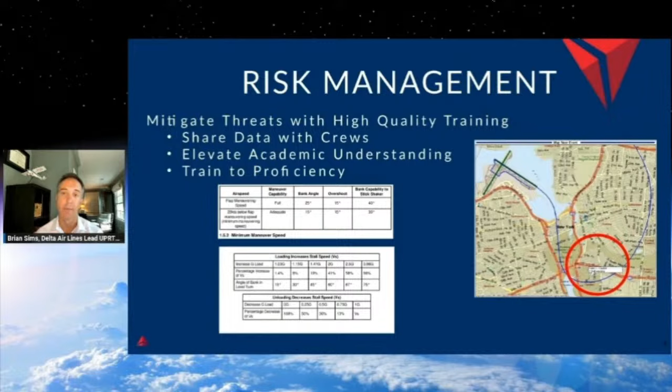We then elevate that with an academic understanding. This may be connected to aircraft systems or aerodynamics, but we want to understand from an academic perspective how that upset occurred. Then we train that to proficiency - first, how to avoid it, but if you've done everything to avoid it and still encounter an upset, we want to make sure our pilots are proficiently able to recover from any upset they may encounter.

If you've heard me speak in the past, I think it's really important in aviation and any training environment that we remember there are 4 levels of learning. At the base level is rote memory, then understanding, application, and correlation. Building on that training, we want our pilots to apply that training in the simulator, and then correlate that simulator or on-aircraft training when they go to the line and encounter the very dynamic environment there.

At Delta, anytime we're briefing a phase of the operation - whether takeoff, approach, landing, go around, whatever it is - we brief the plan. But at the end of that briefing, we always identify the highest threat we're going to encounter in that phase of operation, and then we brief a mitigation strategy. So we always have a plan if things don't go according to plan.

And we fly like we plan. Again, it's a dynamic environment, and sometimes that plan changes. This is where flight path monitoring comes in - it's absolutely essential that both pilots monitor the flight path at all times. If the flight path deviates, we call that out to one another, review the plan, and adjust as necessary.

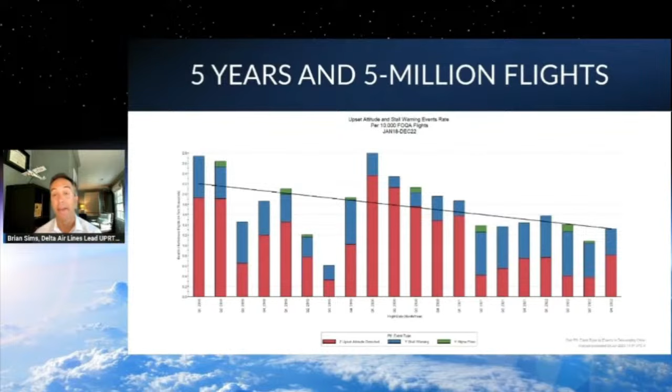And that is over 5 years and 5 million flights worth of data.

Moving on from there, we drill down into each of the specific upsets that occurred. As you can see, the highest number of events we've seen on the line have actually been in the high pitch arena. We track high pitch, low pitch, and high bank, and I'll talk more specifically about some of those events. But high pitch, specifically on the 757, has been the leading upset parameter that gets exceeded.

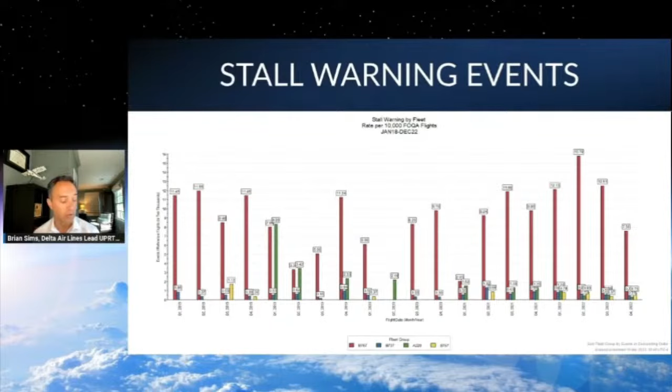This is the stall warning data. This chart is a bit of an eye chart, but it's only for the Boeing aircraft—I'll show you the alpha floor data on the Airbus aircraft in just a minute. This was a bit of a surprise: that red line represents the 767 fleet at Delta, and that fleet has been head and shoulders above all the other fleets in stall warnings. I'll talk specifically about where those events occurred, because they largely occur at a very specific point in time. It's been really helpful for us to understand what's been causing those warnings, and I'll share some examples of things we've done to mitigate that and hopefully bring those numbers down moving forward.

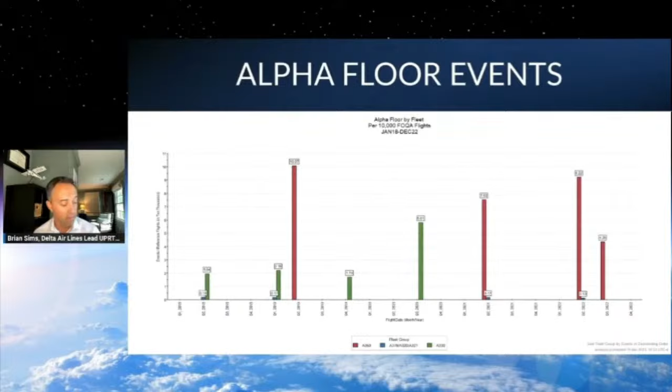Moving on, the relationship between upsets and automation is really, really important. I understand we have different airlines and different corporate and private operators around the world with different ways of flying the aircraft. But one of the things I think is absolutely essential, as an airline instructor who's worked with thousands of pilots over many years, is that we maintain our hand flying skills—that manual flight be something we train and encourage in the aircraft under certain prescribed conditions.

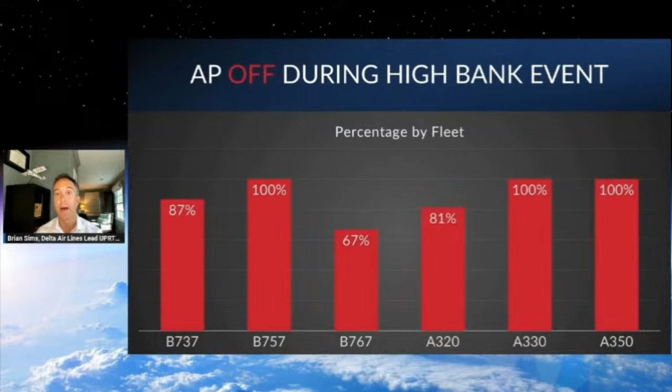There are several reasons these numbers are so high—one is proficiency, one is distraction. That brings up a point: anytime a pilot at Delta goes heads down, we're supposed to tell the other pilot that I'm going heads down, whether it's to read a chart, type in the FMS, or look up paperwork, whatever it is. That raises the awareness of the other pilot to continually monitor the flight path. But again, hand flying skills are really, really essential.

I'm going to give you some specific examples of where some of these upsets occurred, some common denominators we've noticed, and some things we've done to mitigate against that. On the 757, this was absolutely the leading aircraft when it came to nose-high exceedances. On one hand, it's an incredibly powerful, incredibly capable aircraft. On the other hand, if you don't effectively manage the energy of that aircraft and manage the automation, it can lead to an upset.

As they began to rotate too slowly on the 757, that flight director would lead them to a very nose-high attitude in order to get the airspeed back to either V2 plus 15 to V2 plus 25. So one of the things we've done in training is identify that automation issue. But secondly, I've proposed a change to our publications that recommends that even if the automation is taking you above 20 degrees nose up, the pilots stop at 20 degrees nose up and wait for that automation to settle down. Obviously, there are some caveats if ground contact were imminent or something else like that. But under normal operations, we would not want the pilot to exceed these really high pitch attitudes.

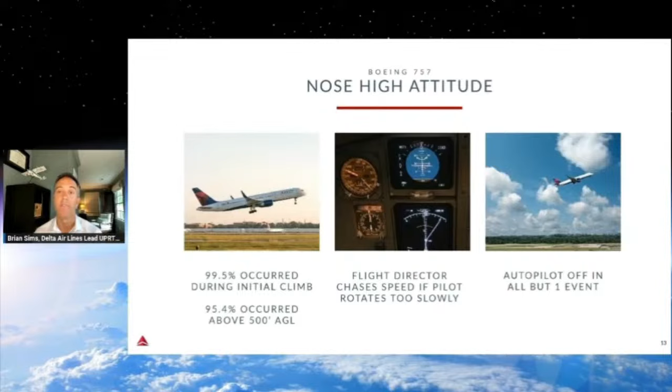The autopilot was off in all but one of those events. So again, just highlighting the need for manual hand flying proficiency.

Nose low - this one was actually a bit of a surprise to us. When we looked at the FOQA data, the Airbus 320 fleet, this includes the A319, 320, and 321, the A320 fleet was the leading fleet for nose low events. In fact, 76% of all nose low events occurred on this fleet. And what was surprising was, one, that fleet was an outlier so far, but that 65% of those occurred with the autopilot engaged. And so that was an opportunity to go back to our instructors and our line check airmen and our subject matter experts and try to determine what the causal factors were.

And I'm not an Airbus pilot, I'm a Boeing 757/767 instructor, so I won't pretend to get into all the details.

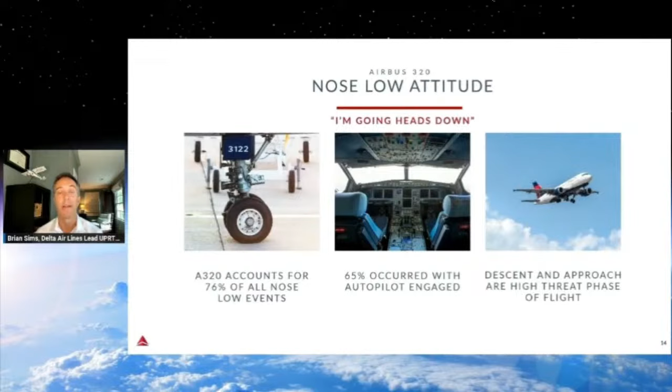But one thing that came out of the data as we were talking to the experts was that it was often when the aircraft was high on the path for an initial descent, and the automation began to chase the speed in order to get the path back under control. And in some cases, it would exceed really nose-low attitudes. So even though automation is great, there are times that it needs to be managed very carefully, and there are times when the automation needs to be disconnected and the pilot needs to take manual control.

Okay, two more examples here. The first is on the 767. I mentioned this earlier - it was the leading cause of stall warnings on the Boeing fleet, and specifically the 767-300. When we looked really closely at the data, what we determined was that at one point, the 767-300 accounted for 51% of the stall warnings at Delta. That fleet only makes up 4% of the entire Delta fleet.

So when you have 4% of the fleet causing 51% of the warnings, that was a really startling number. And then we looked a little closer at the data and determined that not only did it account for that high percentage, but it occurred almost 75% of the time between flaps 1 and flaps up on the flap retraction phase after takeoff. That is an incredibly specific period of time that lasts 10 to 15 seconds after takeoff.

And so one of the things we've done is we have asked Delta to upgrade the flight decks to electronic flight displays. We're going to take the old manual airspeed indicators and keep those, but we're going to upgrade the flight decks so we also have speed tapes available, so the pilots can see their proximity to stall warning as those flaps are being retracted. And quite honestly, the awareness that pilots have that that's such a high threat period of time in the flight - if we can get all hands on deck and everybody paying attention to the maneuvering speeds, the airspeeds, and the flap retraction speeds, that's a win for us.

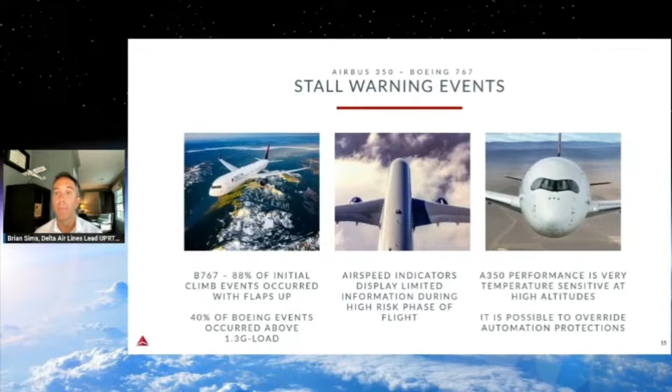Okay, the A350 is the second example I want to share here. I'm going to talk again about this at the end, but the A350, if you'll remember, was the leading Airbus fleet for alpha floor warnings. And one of the things we determined was that it's temperature sensitive at higher altitudes than we initially thought. So we've offered some guidance to our pilots on that, and I'll share that with you at the end.

All right, so threat mitigation. All this data that we have, that's great, but how do we use that?

So I'm going to give you some examples here of how we mitigate those threats in the academic world when we're sharing this information with our pilots. The example on the left is just an old style airspeed indicator. This is what's currently on our 757/76 fleet that's going to be updated. What I'll do when I'm taking a pilot, particularly through initial training, is I'll show them this airspeed indicator. It may be hard to read on your screen, but I'll give you the numbers.

At a given weight, that aircraft has a 1G stall speed of approximately 200 knots. I'll take the pilot through the progression on that airspeed indicator and say, if I increase my bank angle to 30 degrees, this is how much the stall speed increases. Or if I roll over to 60 degrees of bank, or if I get a wake turbulence event and put 2.5 Gs on that wing, how much that changes the stall speed. I can change the stall speed of that aircraft with angle of attack and G load anywhere from 200 knots to almost 290 knots before I exceed the load limit of that wing.

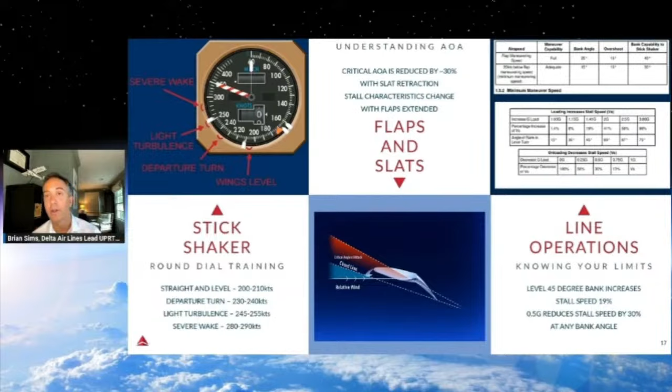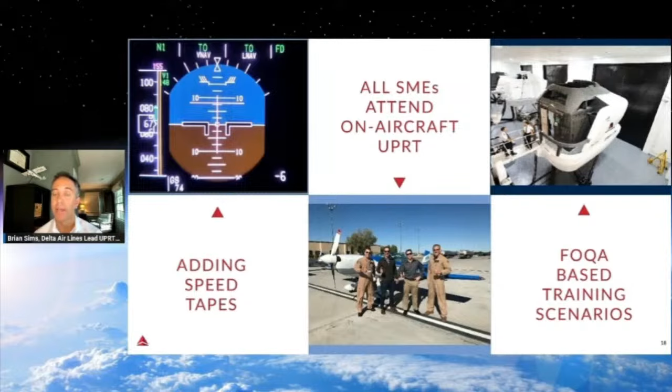And then, as I mentioned earlier, we take the FOQA data and ASAP data and subject matter experts and deliver FOQA-based training scenarios in initial training, upgrade training, recurrent training, what have you.

All right, as we're looking to wrap up here, I want to share some tools for improvement that we are currently using at Delta, and some things that we're looking ahead to in our operation.

So one of the tools we currently use, and I think this is really essential, is an application that Delta uses called Widget Weather, and it gives type-specific forecast turbulence at all altitudes. It also gives the current turbulence report from all the aircraft operating in the system, cloud tops all around the world, and composite radar.

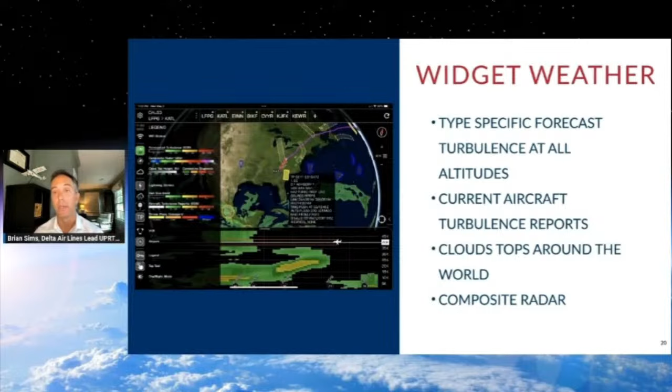When I'm looking at the altitude capability of the aircraft, and I'm seeing that I'm getting within maybe 1,000 or 2,000 feet of the maximum altitude capability on that day, I look closely at this widget weather application to see the forecast turbulence ahead and existing turbulence reports around me, to decide do I really want to push this aircraft any closer to the maximum capability. Because in some cases I might only have 1.3 G capability until I get into a stick shaker at max cruise, and I don't want to do that. So I'm carefully using this application to mitigate that risk and threat, and consider flying at a lower altitude to increase the margin for airspeed and G capability.

The second application we're using is called Flight Pulse, and this gives a personalized flight history to every pilot at Delta. At any given time I can pull up Flight Pulse and see if I've had any unstable events, what level of automation I was using at a given point in the flight. It keeps a record of manual flight time, so now I know down to the second how many minutes and seconds I average flying on any given leg. It gives me aggregate data and shows how I compare to other pilots at Delta. I might average 5 minutes of hand flying on a flight, and another pilot may have 10, or the average might be 20 minutes across the airline.

I'm making up numbers there, but it gives me an opportunity to compare myself to my peers and say, maybe I should think about hand flying a little more. Or, it looks like I've had some unstable approaches in the last 6 months — what could I have done to prevent that, and what can I do differently in the future to improve? I think that's a really important application.

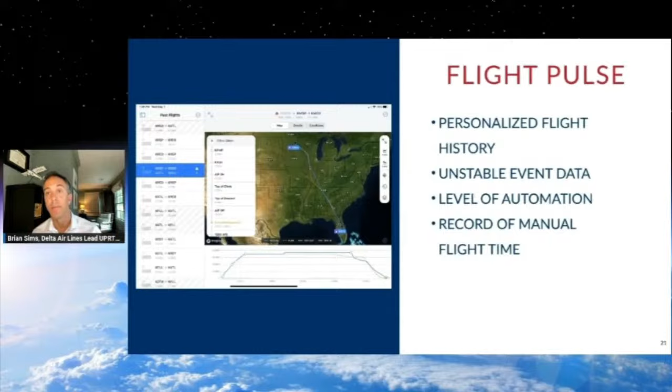Another reminder we put out to our pilots is that the altitude penalties associated with MELs need to be manually applied. That ended up being a causal factor in one of the events we had. So anyway, these are just multiple ways we have given our pilots to mitigate risk and threats in the operation.

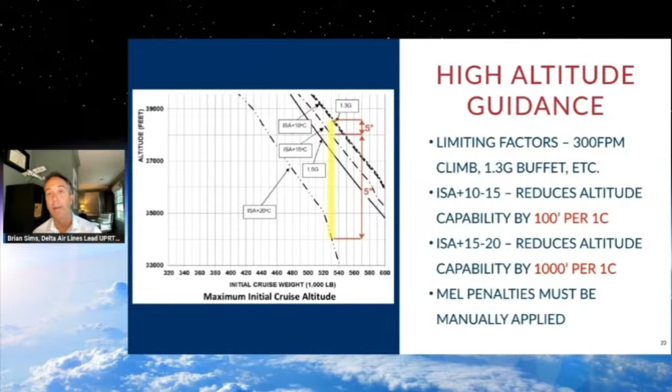Lastly, here is a topic that's been circling in the industry for the last few years, and it's a topic we call loss of margin go-around. It doesn't fit into the traditional loss of control parameters of 25 degrees nose up, 10 degrees nose down, 45 degrees of bank — sometimes it does, but not always. It may be a go-around that was initiated but didn't actually result in a climb within a specified period of time, or the configuration wasn't changed appropriately, or perhaps ground contact became imminent for some reason.

We're in the process of analyzing approximately 9,000 go-arounds that have occurred online, 75,000 go-arounds that have occurred in training, and we're also looking at the qual standards we train our pilots to, trying to identify ways we can train go-arounds better and execute them more safely online. We haven't gotten to the bottom of that study yet, but we're in the process of doing that now, and I think it's going to be an important topic for the UPRT community moving forward.

So as I wrap up here, there are three key takeaways. First, analyze the data in your operation. Secondly, raise the bar in flight training — use that data to train your pilots to proficiency. And then ultimately, apply those skills and that knowledge you've learned in training and share that on the line.

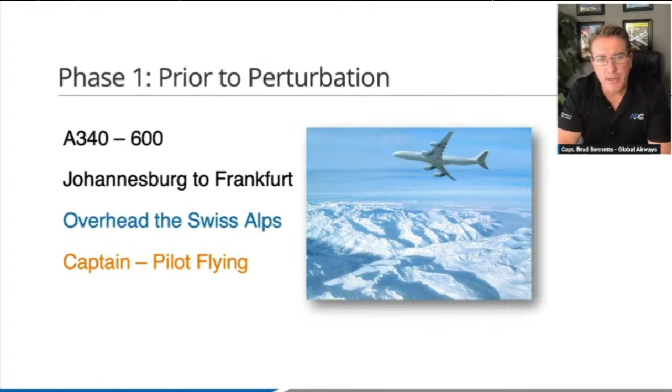Phase 2 was the upset and overspeed that occurred. A few minutes prior to descent, the aircraft was subjected to a rapid wind gradient, consistent with forecast mountain wave activity. Over a period of 14 seconds, there was a decrease of 41 knots in the tailwind they were experiencing, which resulted in a severe overspeed. The MMO of 0.86 was exceeded by Mach 0.03.

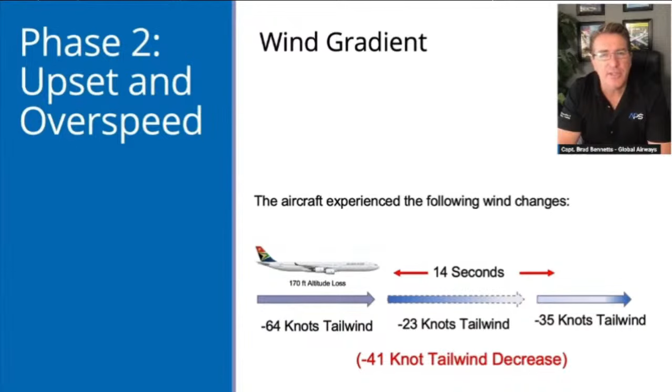At the peak of the overspeed, the trend vector was 30 knots above the indicated speed value, with the top of the trend vector at approximately Mach 0.937. Due to the fact that the speed trend vector was predicting a speed beyond MD, or max design speed, the overspeed was classed as severe.

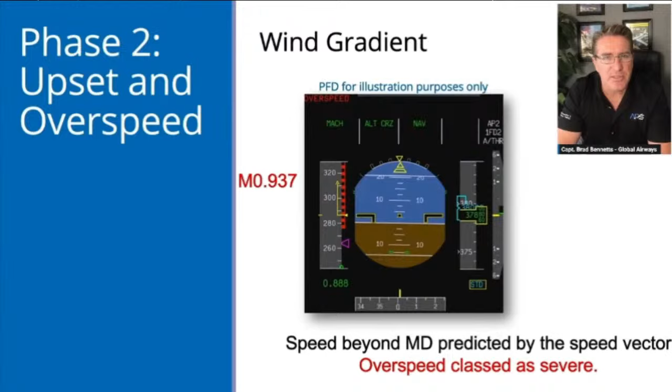The combination of the rapid speed at which the overspeed occurred and the severe predictive trend meant that it contributed to crew startle and the anticipation of significant potential harm. This overspeed also presented in a way that the simulators at South African Airways had not been able to recreate. It was, even for experienced crew, something they had never seen before of similar intensity. The overspeed warning became active and contributed to the surprise and startle effect of the crew, who had been in a relatively low workload environment at that stage.

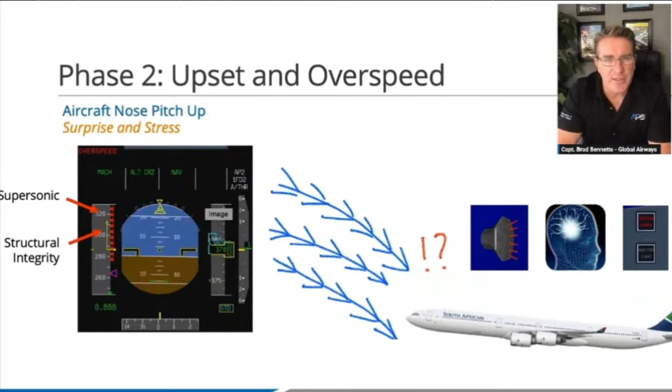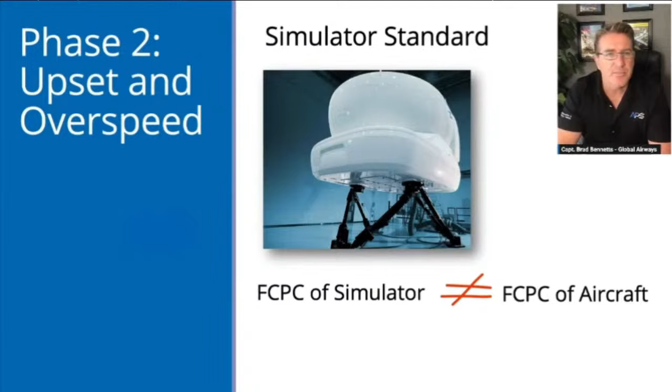During the overspeed, the crew disconnected the autopilot. They received their fair share of criticism over this action, as the Airbus recommendation was to keep the autopilot engaged. However, there was a difference between what the flight crew expected of the automation and the system's actual behavior. Aspects that contributed to this difference included the SAA simulator standard. The Flight Control Primary Computer, or FCPC standard, of the 340-600 simulator was not the same as the FCPC standard installed in the aircraft. This meant that the simulator's automatic system behavior was different to the real aircraft.

During a severe overspeed, the crew's expectation was that the autopilot would disconnect and the high-speed protection would pitch the aircraft nose up. The FCOM describes the autopilot disconnect speed as Mach 0.89. However, when the aircraft reached Mach 0.892 and appeared to be accelerating towards maximum structural speed, the autopilot did not disconnect and the aircraft did not pitch up.

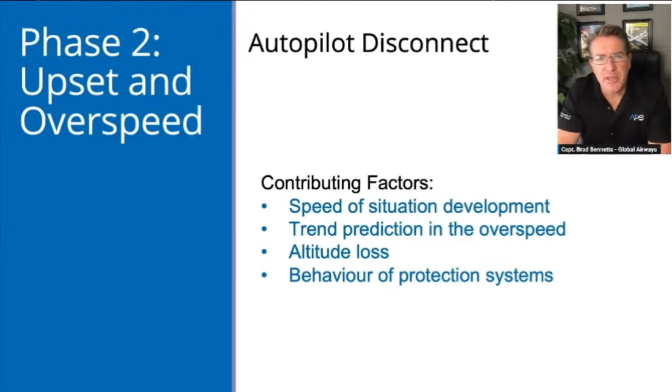The contributing factors that influenced the crew's decision to manually pitch the aircraft's nose up included the speed at which the situation developed, the trend prediction in the overspeed, the altitude loss due to the downdraft component of a mountain wave, the behavior of the automatic protection systems being different to what they were expecting, and also the effect of surprise and stress on the crew to revert to simple, rule-based and intuitive actions to correct the overspeed.

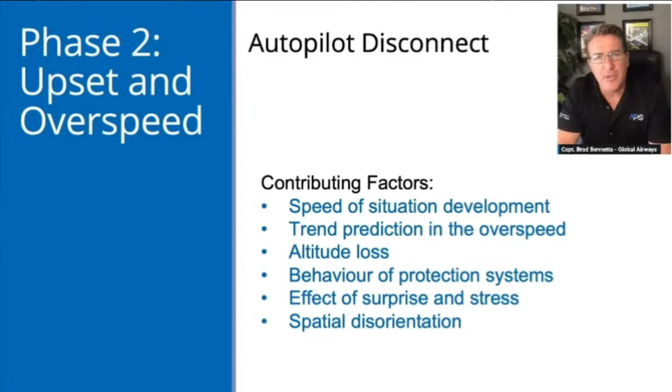There was spatial disorientation caused by the illusion of an aircraft nose-down pitch, which we'll discuss a bit later. Evidence collected in the crew interviews and the FDR data, as well as the recreation of the event in the simulator, indicated that there was significant surprise and stress effects on the crew, which I'm sure you can understand.

One of the crew actually described the fear sensation as having penetrated the deepest part of his body. Now we know that surprise and severe stress often cause crew to revert to simple, rule-based intuitive responses to deal with threats. The action of raising the aircraft nose to reduce speed forms part of the foundational pilot knowledge on the primary and secondary effects of controls, and is normal practice to teach this skill at the beginning of pilot training. This creates what is referred to as primacy, which makes it very likely for a pilot to use when being subjected to stressful conditions.

There was a lot of spatial disorientation. In oversimplistic terms, the aircraft entered a wall of air, the mountain wave. Upon entering this wave, the airspeed reading, which uses dynamic air pressure, increased to show an overspeed. What was misleading about this representation is that it implied the aircraft was accelerating, which was temporarily true from the airspeed perspective, but not from a longitudinal acceleration perspective. The flight data recorder confirmed the mountain wave caused longitudinal deceleration. This presented conflicting sensory signals to the flight crew: what they saw visually was an apparent rapid increase in speed, conflicting with their vestibular sensation of slowing down.

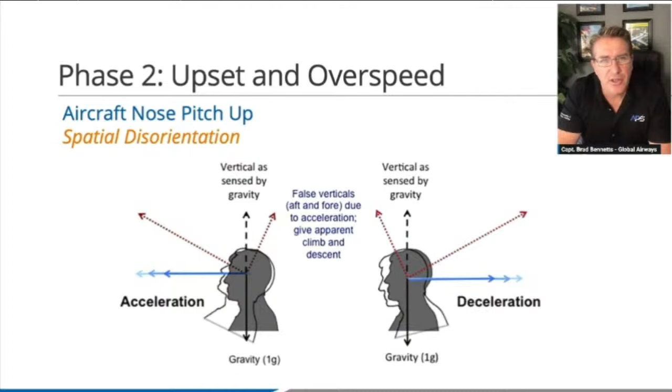The force applied to the pilot's vestibular system in the ears is known as gravito-inertial force.

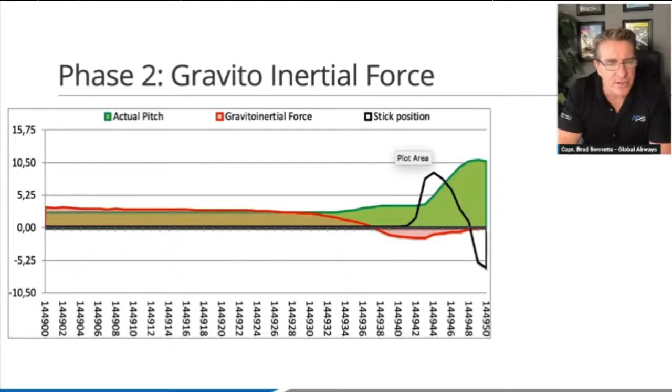In comes Phase 3, the next hole in the Swiss cheese model. This was in the form of the Airbus Operational Engineering Bulletin, or OEB 49. Now, OEB 49 was a red OEB. This indicated that it may have significant impact on the safety of the aircraft.

OEB 49 was issued in response to an undue activation of the alpha protection system, the aerodynamic stall protection system, which occurred on an A321 in 2014. The Airbus 321 lost 4,000 feet of altitude due to the alpha protection system erroneously reducing the angle of attack by pitching the nose down. The incident's probable cause included aspects relating to a damaged angle of attack vane and ice formation.

So this was published in the QRH and the FCOM, and the crew were required to read and review this OEB on every sector. The crew at that stage misinterpreted the scenario unfolding before them as the preconditions for the application of this OEB, and in doing so switched off ADRs 2 and 3.

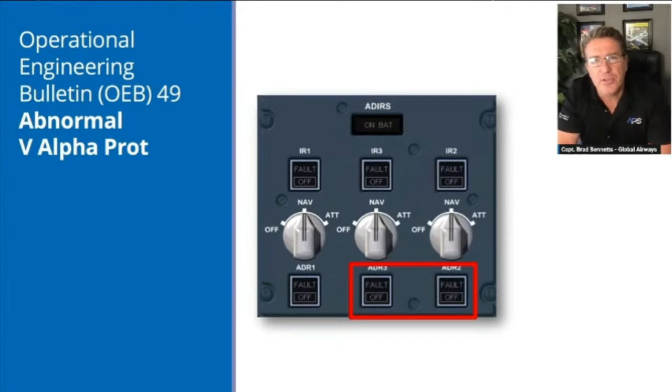In doing so, the flight control law became alternate law, and the auto thrust failed, as designed to do. Due to the overspeed, the auto thrust had commanded idle thrust, so when ADRs 2 and 3 were turned off, the engine thrust locked at idle thrust.

So it's important to understand from the crew's perspective: this moment is 19 seconds into a startling and high-risk event. In other words, the crew had 19 seconds under extreme duress and startle to process everything we have discussed up to this point. The application of OEB 49 caused a cascade of warnings and cautions and had a profound effect on the startle and stress at this critical moment.

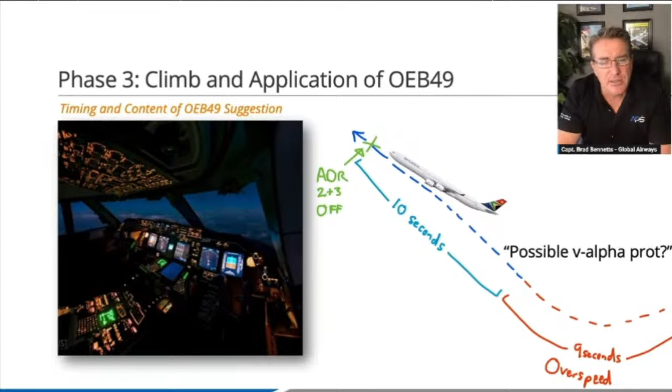When combined with all the other complex factors we've described up to now, it resulted in the aircraft climbing rapidly, at high altitude, with little automatic system protection, and the safety of the flight almost completely resting on the captain, who at that stage was the only one with working displays. At this moment in the sequence, the startle and stress effect increased significantly.

In Phase 4 of the event, which incorporated the speed decay and the crew's stress, we look at the next 24 seconds. The airspeed reduced to its lowest recorded value of 198 knots, and the thrust was sitting at around 36%. The captain stated that he had felt an extreme high level of stress during this period.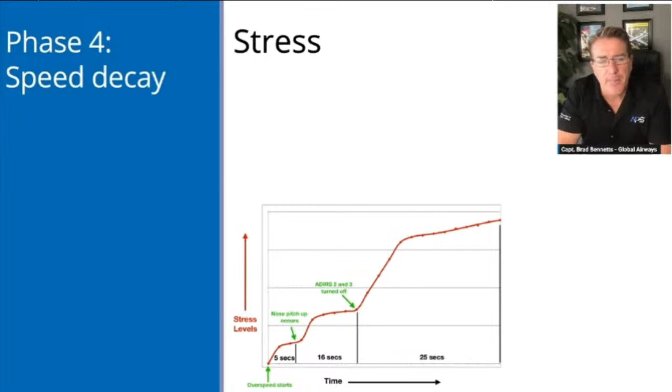He has large gaps in his memory as well. He does remember trying to concentrate on maintaining a constant and safe pitch attitude with wings level. At this point, the third pilot heard the aural stall warning of stall, stall, and noticed that the thrust and the speed was low and was decreasing.

From the onset of the overspeed warning to the application of OEB 49 was 21 seconds. From the application of OEB 49 to the first stall warning was 25 seconds. In those 25 seconds, there was an information and warning overload. There was an altitude alert, a thrust lock chime, three VHF transmissions from ATC, the cockpit door buzzer sounded a few times from the cabin crew, and 25 seconds of master caution.

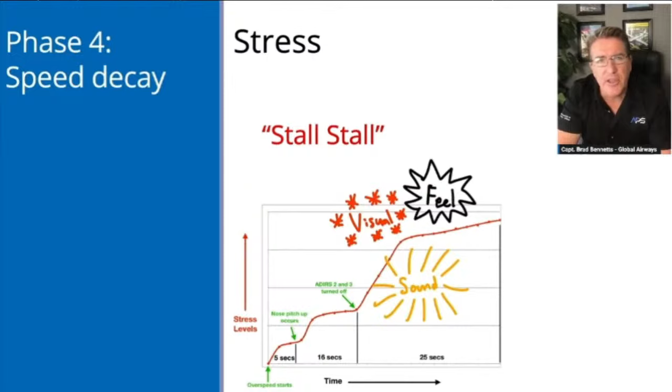So from a visual perspective, the co-pilot's screens had red warnings and no data. The captain's PFD had amber crosses from the alternate law indications, and the flight director would have been providing conflicting guidance. The master caution and the ECAM were producing caution lights and amber lights, and the FMA was flashing thrust lock in amber.

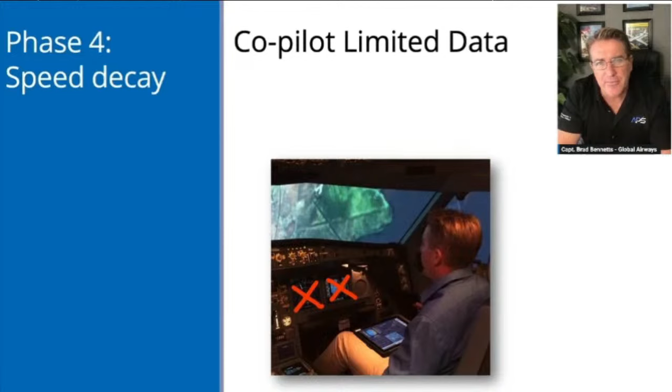So from a handling perspective, the captain was flying the aircraft manually, in alternate law, at high altitude for the first time ever, which due to maneuvering stability would have made manual flight handling of the aircraft very challenging.

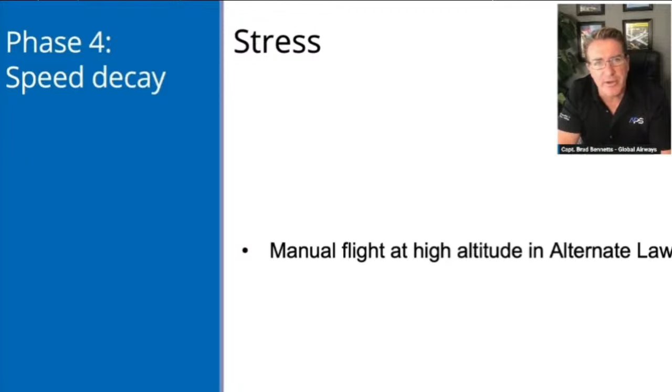Interviews with the crew indicated gaps in their memory during this period, and we know that retrograde amnesia can be associated with periods of extremely high stress levels. Research has shown that this could be for up to 30 seconds. The captain, for example, only recalls trying to maintain wings level and a constant safe pitch attitude while feeling like he was in a state of shock.

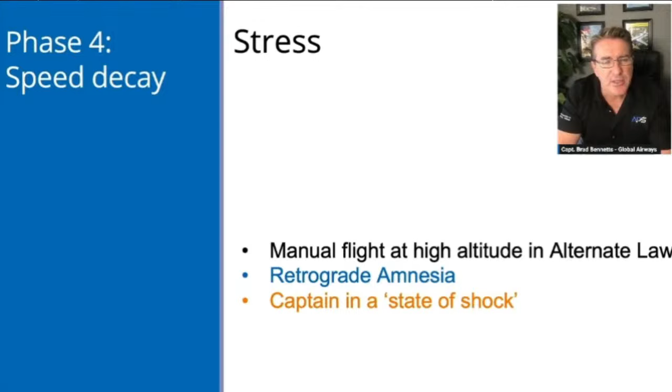The last aspect that probably contributed to the crew's acute stress was the disruption of preconditioned expectancy. Pilots develop expectations of high reliability from their normal daily operations. The perceived failure of the system to adequately handle the event and the apparent malfunctions that occurred disrupted the crew's conditioned expectancy, which may have significantly added to their stress levels.

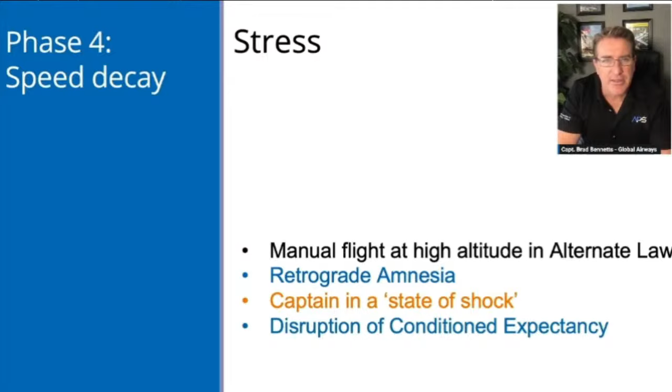At this point, as the airspeed decayed to the alpha stall warning, there was a breakdown in active scanning and monitoring of the speed scale. Each pilot was facing a different perspective and role, as we have said before, and a tremendous amount of information overload through the effects of high stress.

Let's now look at phase 5 of the event, which is the approach to stall recovery.

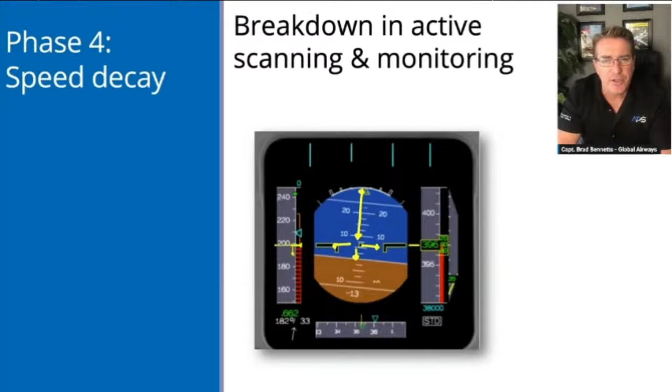The conclusion at this stage was that the aircraft was in the approach to stall. The aircraft was at an altitude of 39,900 feet, and the grid MORA over that area of the Swiss Alps was 16,600 feet. In simple terms, the aircraft was about to run out of lift.

The single most important and critical act that the crew performed to avert catastrophe was the upset recovery maneuver. This brought the aircraft from a state of an approach to stall and loss of control into aerodynamic stability with control. As discussed previously, the crew had high stress levels, confusion about aircraft system state, but instead of an ineffective, incomplete or absent stall recovery, they had been properly trained to apply the APS all-attitude upset recovery strategy.

The captain recalled hearing the aural stall warning as well as the feeling an aerodynamic buffet, and he responded by applying the recovery strategy. The co-pilot remembers thinking, 'We're in big trouble. We had to get this aeroplane flying.' He too was brought into the loop with the shouting of the upset recovery strategy. There were three cabin crew who reported feeling a rattle go through the aircraft like they'd never felt before.

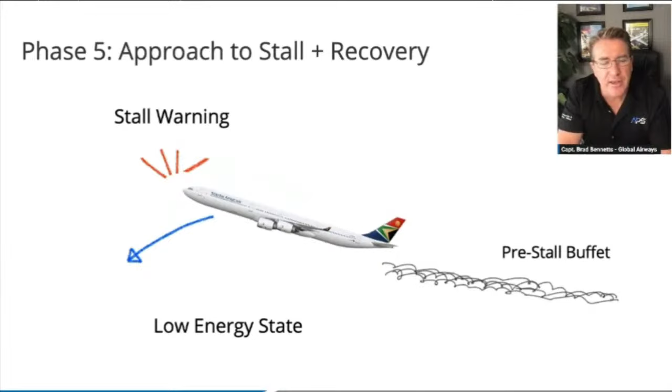The captain, immediately after verbalizing the strategy, pushed the side stick forward to achieve a nose-low pitch of -6 degrees. During the initial moments of the recovery maneuver, the captain made 4 successive push and pull movements on the side stick. The stall warning activated 4 times, and the maximum recorded angle of attack value was 8.1 degrees.

The investigation team and Airbus's accident investigation representatives were in agreement that the conditions of high altitude, alternate law, low energy, this all provided a sluggish aircraft response to pitch commands, and that the oscillations were related to the unfamiliar circumstances for the pilot flying.

The captain also took hold of the thrust levers during the power step of the strategy and started to manually advance the thrust, which at that stage had been locked at idle since the failure of the auto thrust. The altitude dropped from 39,700 feet to 35,000 feet during the recovery, with the vertical speed ranging from -2,000 feet per minute to -6,200 feet per minute.

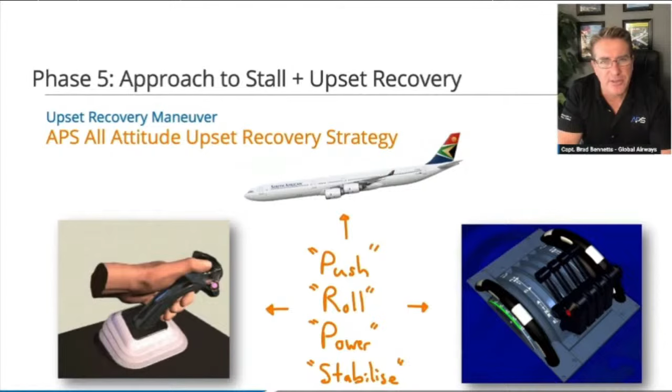Phase 6 of the event is the system's recovery to normal flight. With the overspeed and the approach to stall resolved, the crew turned to dealing with the landing in Frankfurt, and once the ADRs were re-engaged, the aircraft's flight control primary computers returned to normal law. The autopilots were re-engaged, and a safe landing was carried out in Frankfurt.

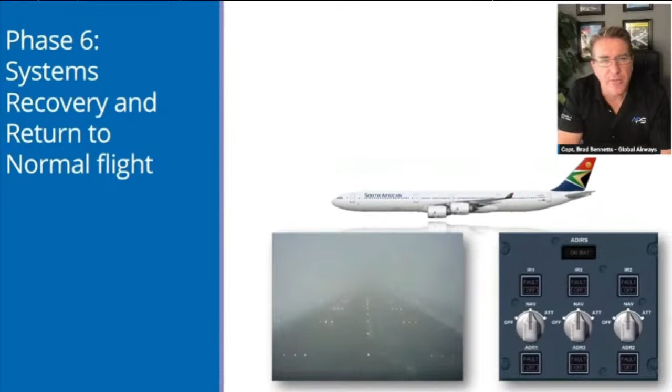In summary, the stall warning and the UPRT upset prevention and recovery strategy provided the training for the cues, the goals, the actions, and the expectations that extracted the crew from this high stress and low situational awareness into attending critical priorities. The human factors expert referred to this type of action as recognition-primed decision. The situation is assessed by understanding the goals that fit, increasing the importance of relevant cues, forming expectations by using mental models, and identifying typical actions required, all a function of the UPRT or all attitude upset recovery strategy.

I hope that by the end of the summit, everyone here will realize the importance of effective UPRT program training, the importance of having a properly trained instructor to deliver the program. Thank you for your time.